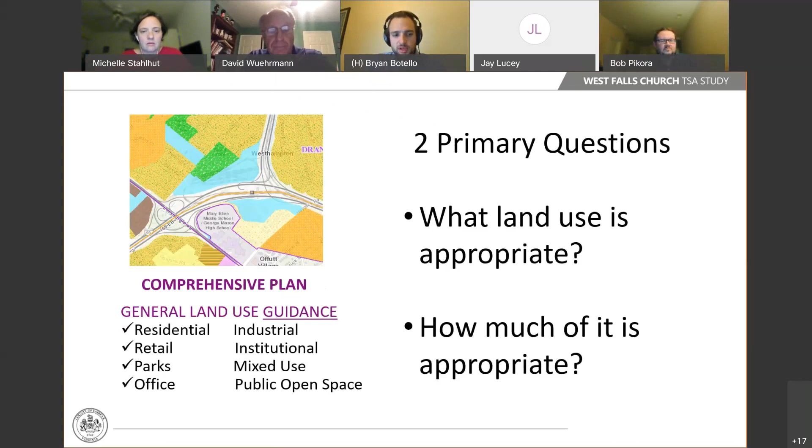In addition, there are some other questions we seek to answer in the comprehensive planning process, but they're by no means the only ones. Especially in transit station areas like West Falls Church, our community business centers, and our urban centers, you can find additional types of guidance in the comprehensive plan. This is by no means an exhaustive list, but you can find design guidelines or recommendations on establishing connections or smooth transitions between developments and neighborhoods, and guidance on the location of public facilities and amenities.

As I said, these are general guidelines. While many people are interested in details like what retailers may be there or what styles of architecture, we don't go into that kind of depth in the comprehensive plan. It's more about bigger picture issues, like does residential go here, does office or retail go here, is it mixed use, and how many square feet or dwelling units are appropriate.

So with that being said, what's our process here with the task force and the West Falls Church Comprehensive Plan Amendment? I'll finish covering these four items quickly, and then it may be worthwhile to pause for a couple minutes to make sure these are clear to everybody, so we can open it up for a couple questions from the task force.

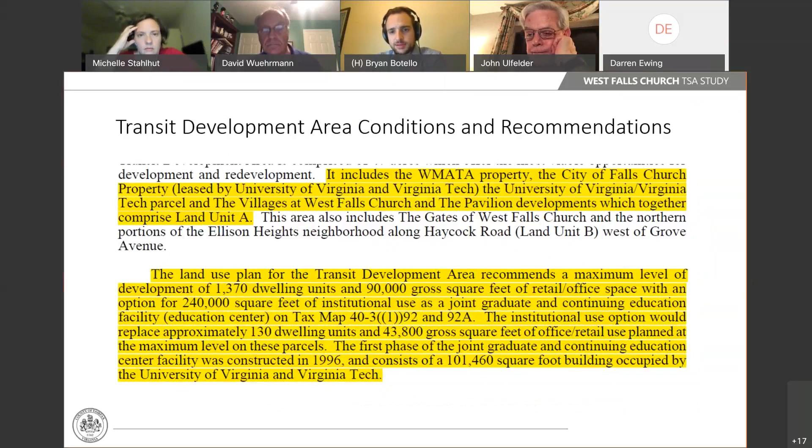Right now we're not looking at any draft text, it's all currently adopted plan text. The same with these figures. For example, this is figure 13, which is in the current plan for the West Falls Church transit station area. We would imagine that the City of Falls Church and the University of Virginia-Virginia Tech tract would probably be combined into a single tract and renamed the Virginia Tech tract.

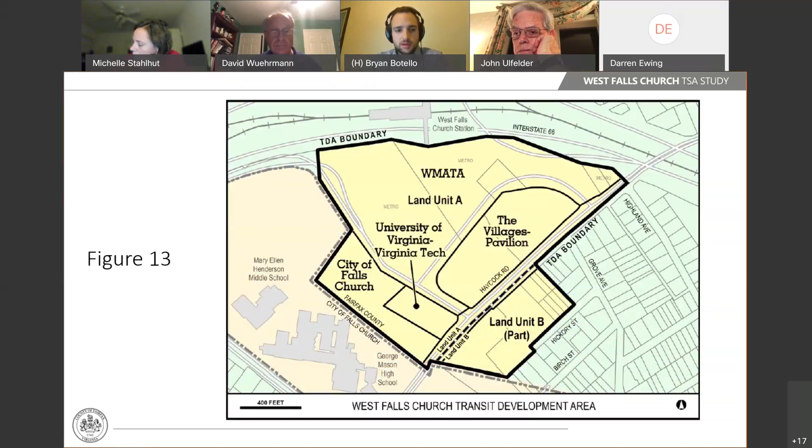And then the bulk of the updates we're expecting would be under the site-specific recommendations in the Land Unit A section. So pictured here is part of the recommendation on the WMATA tract. As I mentioned earlier, we're looking at land use and intensity, so it has the location of where we're talking about, and land use appropriate for residential development, and the intensity, 30 dwelling units per acre. And then it has other guidelines, as I mentioned, to the extent that such development complements rather than competes with the use of the transit hub, and it recognizes some of the surrounding uses and how this fits in.

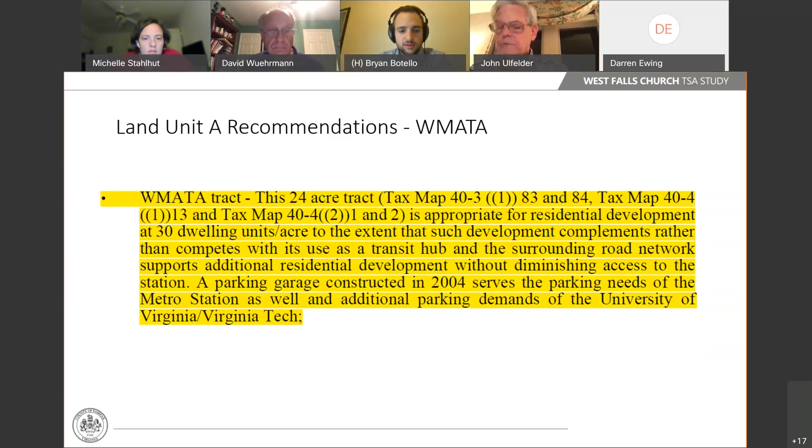Similarly here, the part of the Virginia Tech recommendations. This is kind of the meat of what that task force will be looking at in terms of a plan amendment. So this is the guidance found here specific only to the Virginia Tech parcel and doesn't relate to any of the other portions of the transit station area. Again, you can see recommendations on land use, institutional use, or residential or office retail, and the intensity: 240,000 square feet of institutional, 130 dwelling units, nearly 44,000 of office retail. What's not pictured here are the site-specific conditions for Virginia Tech, which encompass some more of those other guidelines that I mentioned earlier. You can find those in that highlighted document that I sent around to the task force.

So now that we've briefly covered what's up for amendment in the current plan, let me go over the types of edits you can expect to see. There are 3 different types of changes: editorial changes, which aren't substantive; formatting changes, moving things around for clarity; and then what this task force will focus on, the substantive changes that affect the land use recommendations in the West Falls Church area.

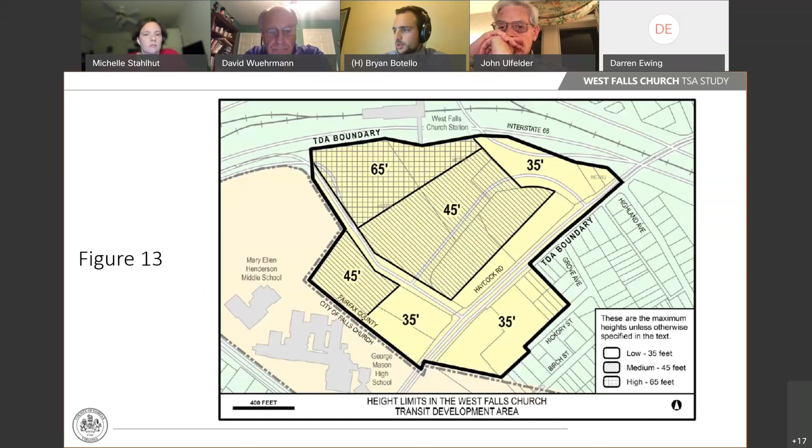And as I mentioned, the figures in the plan will have to be considered for updates as well. I hope that provides some clarity to the task force on how we'll be looking at the plan amendment. So at the next meeting, we can start to review some draft text. Are there any questions regarding that?

Let me see if I can open up my participants tab. Any hands raised from the task force members? Was that clear? I don't see any, Brian. I don't see any hands raised except previous ones from attendees that I'm sure they haven't taken down. Oh wait, I'm sorry, there is one. Are we taking questions from attendees as well as task force members at this point or not? Right now we were just going to do task force members, especially because we're under a bit of a time crunch.

I would say to anybody who's got their hand up who's just an attendee now, if you still have a question at the end and we have time, maybe they can ask then. Brian, if we have the time. Yeah, that works. All right, I'm not seeing any task force hands up. In that case, I think that was helpful. Thank you. Yeah, of course.

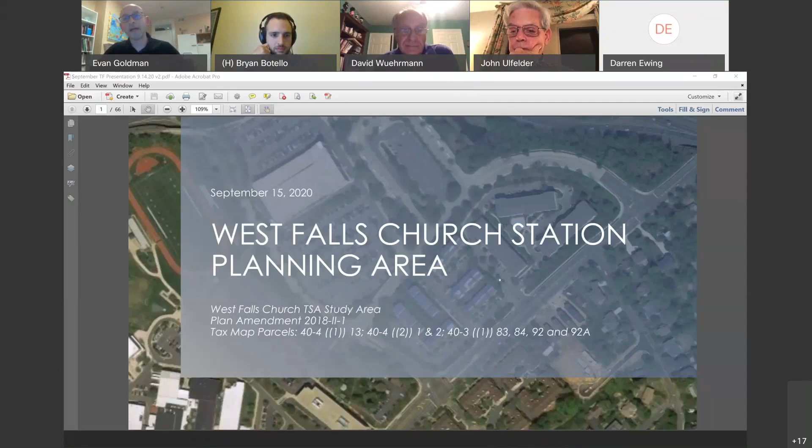Great. I'm going to actually, so for some reason, weird. Okay, you can see it now. You can see it says West Falls Church Station Planning Area presentation. Yes, excellent, it's the cover sheet. Great. Okay, so as I present, I will just confirm that we're on the same page, because sometimes it's a little bit slow. So with that, I'm gonna move forward.

Okay, there we go. So first of all, for those who didn't hear at the beginning, I'm Evan Goldman, Executive Vice President of Development and Acquisitions at EYA, a local development company. There's a number of us on the call today: from Rushmark, Neil Kumar; Brant Snyder from Hoffman Associates; Pam Lee from my office at EYA. You already heard from Kevin Sitzman, our traffic engineer. I believe we have our land use attorneys on the phone as well, Andrew and Bernie from Walsh Colucci. And I think that's it, but I may have missed someone, I apologize if I did.

So with that, today we're going to talk about progress and process update, concept plans for West Falls Church Station area, which for some of you will be the first time you've seen this. We have been doing some community meetings, so some of you have already seen some of the slides. We'll talk about circulation and mobility, and then traffic analysis as well.

So just to give everyone a progress update of where we are and where we're going: a year ago, at the September 2019 task force meeting, we presented some development proposals. Throughout the winter, we did traffic studies and continued to modify our plan. As you know, we took a little bit of a break for a period of time while we tried to solve the intersection issue at Route 7. Then COVID hit in March, and that slowed us down for a few months. So spring of 2020, we didn't really have any meetings until the summer.

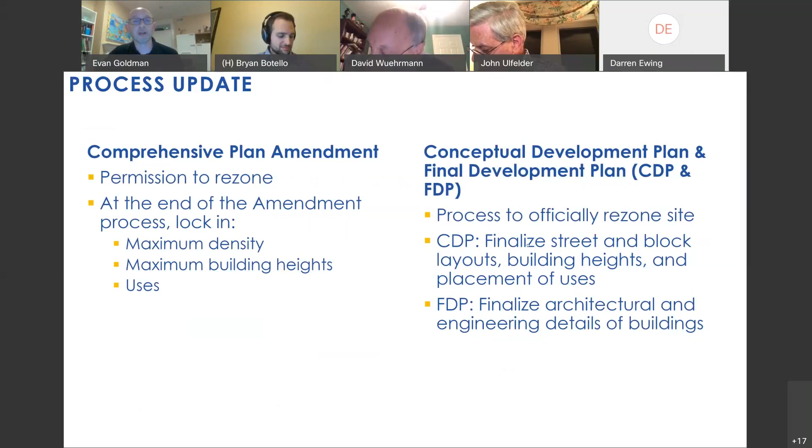So this process, while it has taken a while because of COVID and the traffic studies and the unique attributes of this area, the request is not particularly large. It's really about how do we do it right? How do we get the right grid of streets? How do we come up with the right plan? How do we provide better access to transit and design a project that's mixed use and really amazing? That's what this process really has been about and really should be focused on.

So this is our new concept plan that we've been working on and we've shared with some of you in your community meetings. The main goal really stays the same: creating a safe pedestrian and bike oriented way to get through and to the metro from Route 7 all the way to the metro, and then continuing those bike lanes all the way out to Haycock so that those coming from the community on the other side of Haycock will be able to get to the metro more safely, as well as the new people moving into the apartments, condos, or townhomes, as well as those working in the office buildings within the actual parcel—this ability to get around without having to rely on the car.

So this central spine open space is really critical. And then secondly, getting the existing bus infrastructure a little bit more out of the way. Today, that bus infrastructure really sits right in the heart of the WMATA site, so to walk to the metro, you're walking through essentially a parking lot. The concept here is to make that a great urban street and put the bus infrastructure on the outside up against Route 66 so that it doesn't impede the pedestrian bike flow to the metro entrance.

The Commons Drive, just to give you also a sense of scale, the City of Falls Church has rezoned that property for about a 3.5 FAR. Obviously, we're not the developer of that site, whereas the WMATA site is a 0.96 and the Virginia Tech site is a 2.5. So a little bit different than what you would typically see.

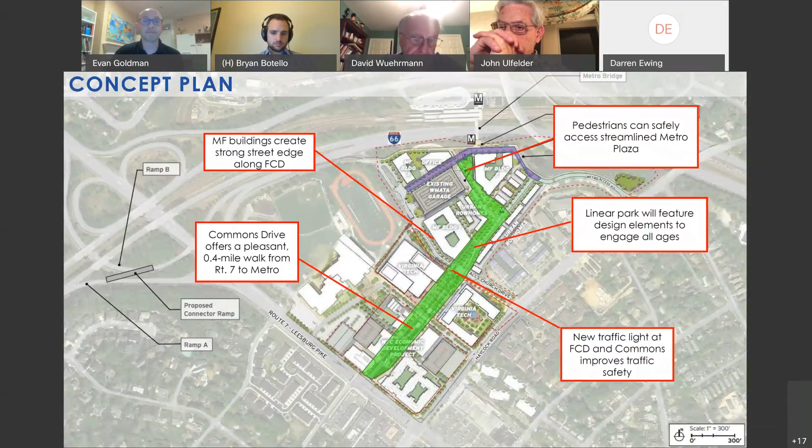This is just to give you a sense of part of the reason there's so many different types of uses within this plan—from residential apartments to condos to senior housing to hotel to office to academic to townhomes—so that it can be absorbed relatively quickly, meaning we can build this without it all competing with each other. For example, if this was what's already proposed, 700 apartments, that's going to take years to absorb, which means you have to build it out over a longer period of time. That means the community is getting it piecemeal.

Whereas what we've come up with here is a design for the whole neighborhood that, because it's all different uses that work well together, we can deliver it all within a 3 to 4 year period of time. So everything you're seeing on this page would be built before about 2024, 25, with the city parcel going first, followed by Virginia Tech, some more apartments, and the townhomes. That's great from an absorption perspective—it means we're not flooding the market with one product type and potentially tanking the market, whether that's townhomes or rental apartments.

And what it means is you get all that infrastructure, all the open space, all the walkability up front with this first phase of development. It all comes online together, which is really great. And that's actually pretty rare. Most projects of this scale get built a little block at a time, and you get the infrastructure along the way, sometimes behind and sometimes ahead.

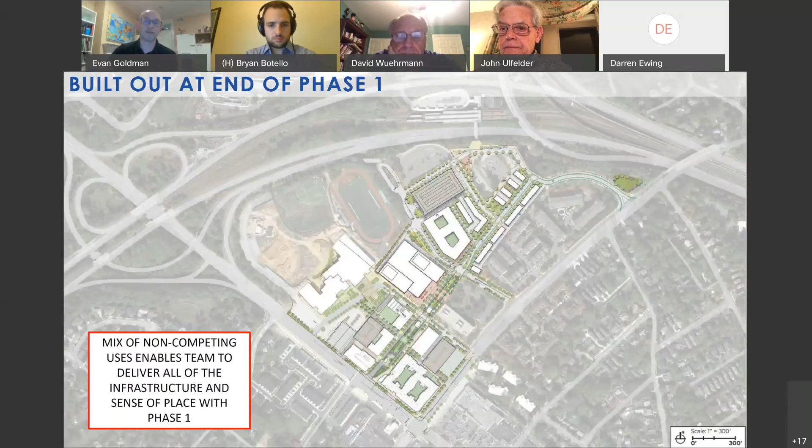And then this is what it looks like when it's fully built out and complete. You can see these dark green lines are the bike lanes going all the way up and connecting to Haycock, as well as pedestrian spaces. Those are all really nice broad sidewalks. There's a shared use path that connects directly to the Metro from the bike lanes, and sidewalks everywhere, which I'll walk through as part of our circulation plan in a few slides.

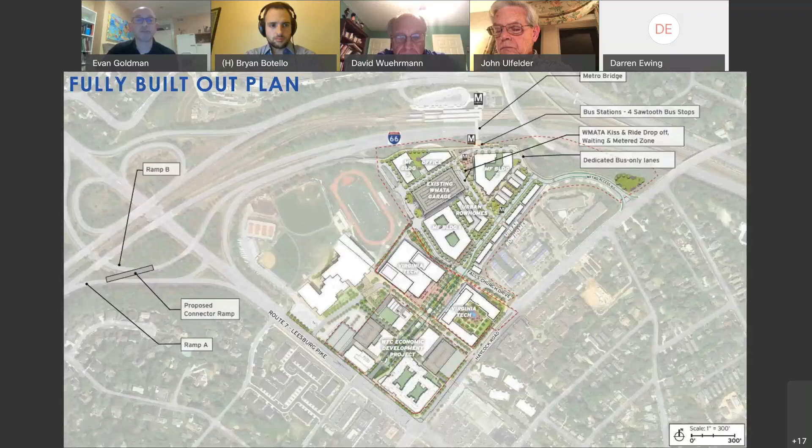We've spent a lot of time thinking about and talking about open space. I think we shared with this committee back in February some pretty images of what we thought those open spaces might look like, and we've been sharing that in our community meetings with folks.

But this just gives you a sense of scale of how it breaks down and what the percentages are. Overall, each of these numbers are highlighting different spaces within the plan that are open spaces to be used, some of which are within the city, some of which are in the county.

As you can see, we've included the fields within George Mason High School, and that was purposeful. About 50% of their rec league users are county residents, not city. So it really is an asset, whether you're walking over there to use tennis courts or run on the track. It's kind of a shadow anchor outside of the county, but that's always worth being aware of.

So what this plan ends up with is about 24 acres of open space. It's 37% open space on the WMATA site, which is almost double the requirement. On the Virginia Tech site, it's 50% more than the requirement at 30%. So there really has been a lot of thought put into making this an open and green space, preserving tree preserves, creating tree preserves, and working with county staff and the task force to make sure this feels like a livable place long-term.

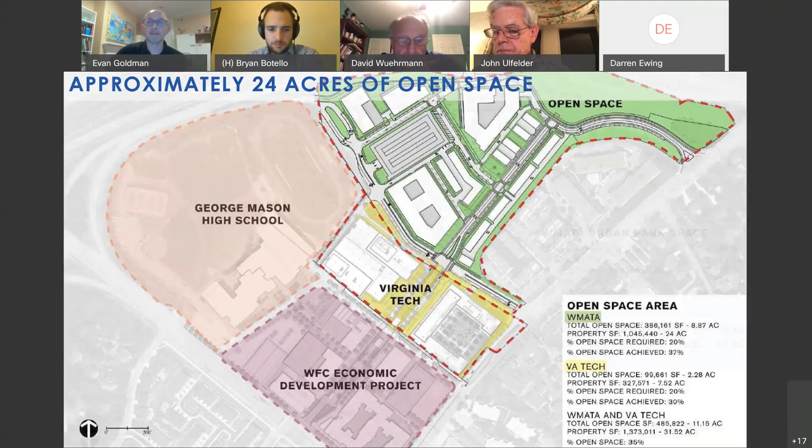So on the next slide, we'll get into each individual project. On the WMATA site alone, in addition to the open space, which is double the requirement, the urban park space requirement would typically be 2.1 acres on this project. We're at 2.56 acres, so once again above where the urban space requirement would be.

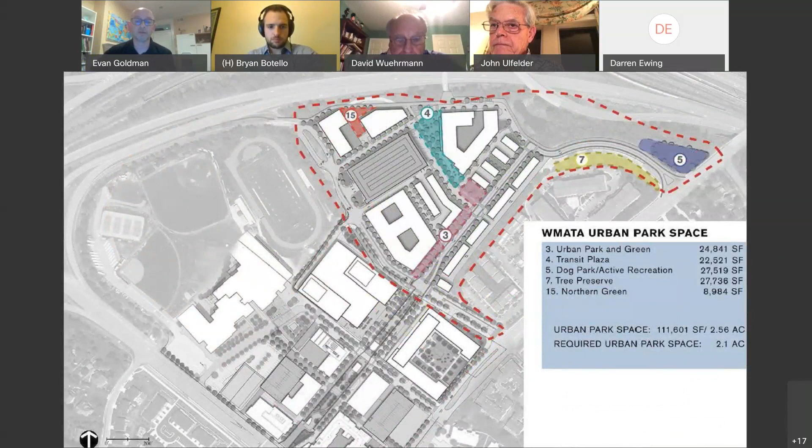And then the key would be at CDP, really working with staff and the community to design each of these spaces thoughtfully. We have some ideas already, of course, but that will get better with time. Virginia Tech similarly has a requirement of 1.3 acres, and they've got 1.58 acres of active rec space, so also above the requirement.

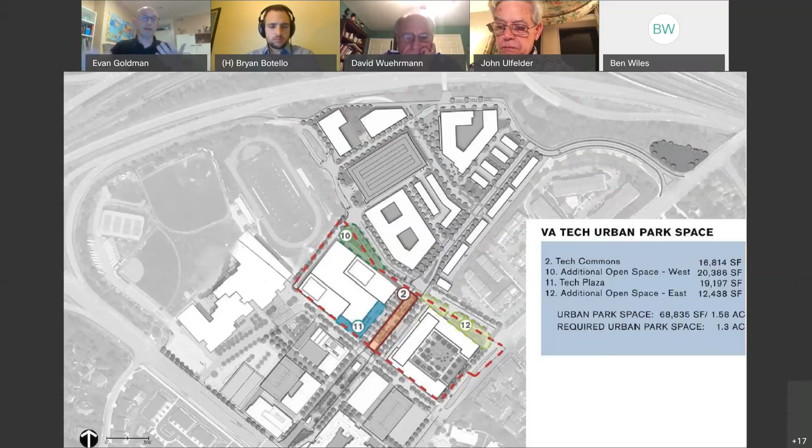So combined, as I said before, one of the really big impetuses of this plan is that the zoning recommended in the comp plan was especially suburban in nature - kind of low level, 700 apartment units spread throughout the site. What we think is more appropriate is, where it's appropriate, let's have some taller buildings and create as much open space as possible. And that's what we've really done.

Before, we always struggled with where this street was supposed to go, and we finally just made it straight, which seems to be the most logical thing to do. It'll be the best for traffic flow, for bike flow, and for pedestrian flow.

The space behind the townhomes here is actually the roadway today. So you can get a sense of how far those homes are from you, and you'll have that tree screen blocking your residences from the new development.

We've kept the heights low and the development low intensity along the existing residential, and then stepped up towards higher heights and density as you get to the metro itself.

As you know, on the high school site and on the Virginia Tech site, the park space is in the center median. When you get to the WMATA site, because of the geometry of the site, we've pushed the open space to the western or northwestern side of the road instead of in the median, but it continues as an urban linear plaza and then ends in a park and wraps all the way around to the metro.

So the concept is once you get here, you can see that metro, and this whole space will be designed cohesively so it feels like a space that was designed appropriately.

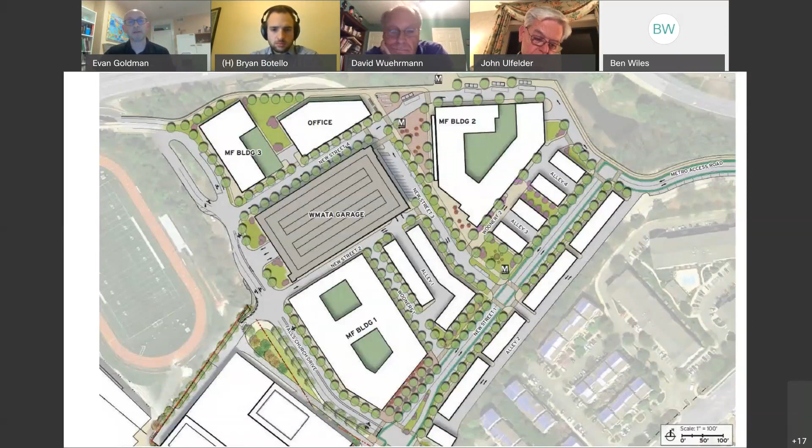That concept along there would be, and we've actually been working with staff on some new ideas related to this, so this will change a little bit.

But the idea is alleys of trees that really make it safe and comfortable to walk there. Obviously stormwater management, elements of play along that pedestrian experience as you go through the WMATA site to the metro, that in and of themselves can be draws.

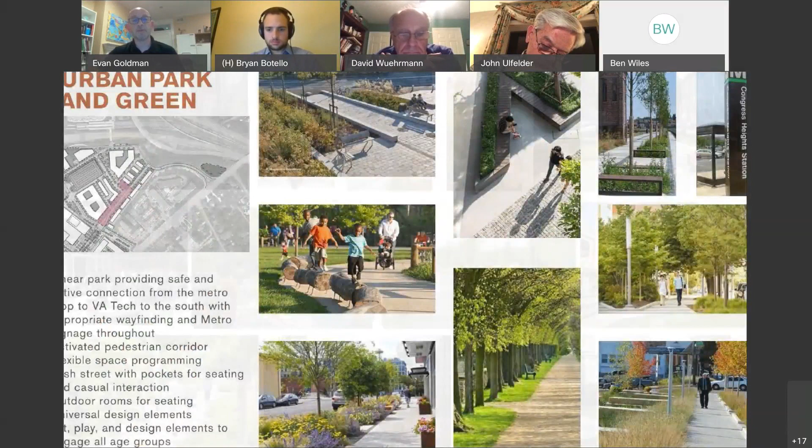On this next slide, there were two images we really loved, or three, I'd say. One is this kind of kids play structure in Noma in DC, which is a multi-level play structure that's linear in fashion, where you can imagine people walking their kids or grandkids into this urban plaza and playing, and also creating activity on the street.

The idea of a garden or something that in and of itself becomes a draw, so that if retail is not active and retail is still struggling, there's some other reason to come to this place, whether it's to see the beautiful roses blooming, walk in a botanical garden, or sit and enjoy outdoor seating areas protected from vehicular traffic with movable furniture. And of course, open spaces where people can throw a Frisbee or just enjoy. That whole concept stretches from the high school site all the way to the metro.

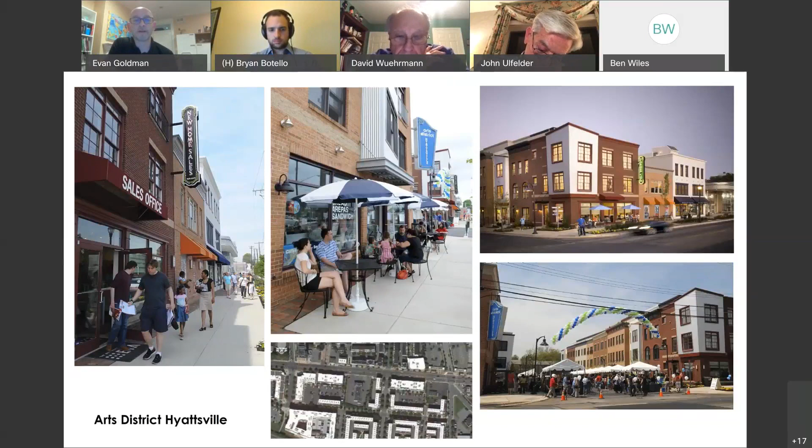I've been talking to a particular staff member about how you could do that within the Fairfax County zoning ordinance. These are additional images of what that project looks like today. Even though those are townhomes, they have a much more multifamily oriented feel. As I said, this won't be the architecture, but it gives you a sense of scale and concept. This is another image from that project.

I will say this project was cutting edge in its day. This was in Prince George's County, and these houses sold for $300,000 to $400,000 each. So very different architectural style and level of detail than you'd find in Falls Church, but it was successful in its own right.

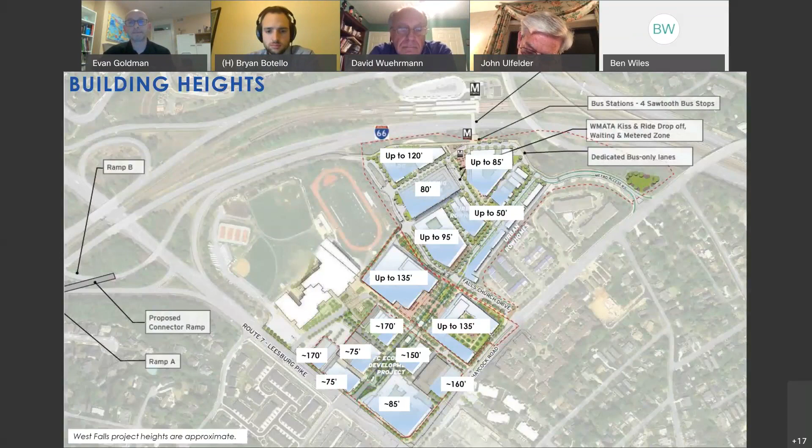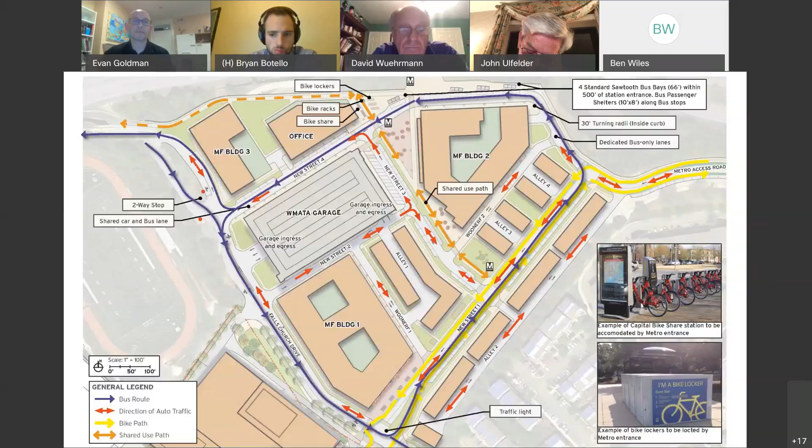The bike circulation in the larger area, there's a shared use path on Route 7. We'll be building bike lanes all the way from Route 7 over to Haycock.

One thing that came up tonight that is worth working with the county on, and I think it's been expressed eloquently, the streets within the Mount Daniel neighborhood on Grove and Highland do not have sidewalks. You're 100% correct that they're not safe. And similarly going over the tracks to the neighborhoods to the east of Route 66.

And so I know that the city and the county have worked effectively to get some NVTA grant money to build sidewalks on Shreve, just to the other side of Route 7. And I think really, if the community really wants to see something like that, that's really something to focus on, because I agree you want to have those safe pedestrian areas throughout these neighborhoods. And it's a shame they weren't built with sidewalks to begin with.

But you can see the bike lanes here, as well as the shared use paths, and then the vehicular flow for the whole larger area.

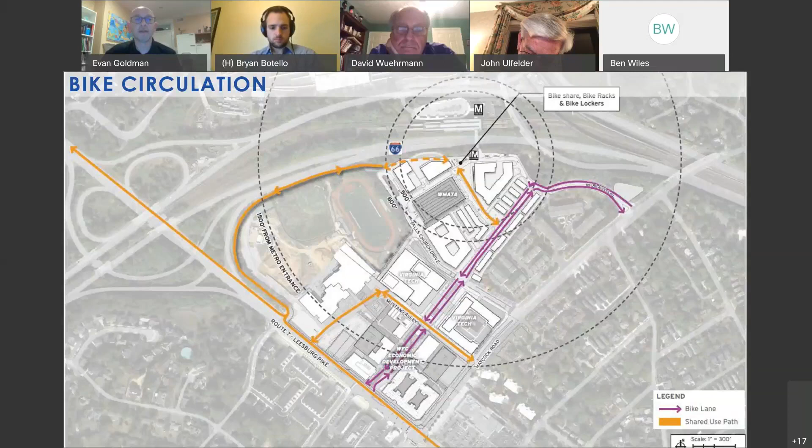I'll highlight one thing here that we'll come back to when we get into the traffic study. This ramp is really critical. It's under construction now, and it connects the 66 off ramp, where all those cars today come to Haycock, make a left turn to go to the metro, and clog up this intersection. With this addition, people who want to go to metro from the west will be able to get from 66 all the way to the metro itself more quickly and directly, without going through your streets or your intersection. That takes roughly 300 to 400 cars out of this intersection and helps make this function much better. We'll talk about that shortly.

Obviously, primary access and flow is still on Leesburg Pike and Haycock. Secondary is this grid of streets we're creating, which is really critical as well. Somebody on the call earlier mentioned Waze and Google Maps, which is really often how people get around neighborhoods today. More than likely in the future, as local folks, if you need to go to Haycock and make a left, and you live in the pavilions or the villages, for example, or to the east of Route 66, you would likely shoot off onto the new Main Street and make your left turn here because it's going to be a faster route than sitting at Haycock. What it does is it allows for distribution of traffic.

And what's great about the apps is, normally in the old days, if you just looked at a map, you would never think to do that, because your assumption would be the fastest way would be to just go straight and make a left turn. Those apps, because of their algorithms, can help point you in the right direction where there's less traffic flow.

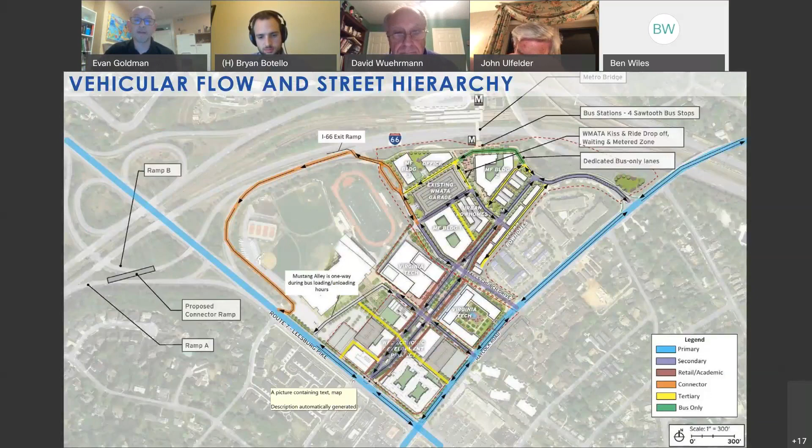That has been, I'd say, about 8 months of really, really hard design work to come up with something that seems to meet everybody's needs, that allows the commercial property owners to have access, protects the neighborhoods on the other side of Route 7 from cut-through traffic, allows the left in and left out, and allows people to have access to the metro and all the new development here. This is the solution that has been arrived at, presented to VDOT, FCDOT, the property owners, and the supervisors. The concept is that at the end of Chestnut Street, Chestnut will now close.

It will end in an open space, and then there will be an opening into the current shopping center next door. Essentially, we'll have a new opening that will be at a traffic light. So for people who live in the neighborhood who want to make a left turn out on Route 7, they will have the ability to go through that shopping center to make a left out. Waze and other apps won't take people there because it'll show this as a dead end, but local folks will be able to know how to do that.

For you as well, since you guys live in the neighborhood, that's something that you might end up using to cut, to go straight or to make a left turn onto Route 7 from there. And what it really does is it allows the commercial property to maintain their access as well. They were under threat of potentially being closed off with a right in, right out along this entire edge.

And that is how we were able to solve this issue and create a traffic light, which then creates safe pedestrian crossing and gets a lot of these folks the ability to walk or bike or get to metro more easily. And I was listening to a lot of the questions tonight, and traffic is clearly one of the biggest issues in this area. But traffic solutions are things that build on each other.

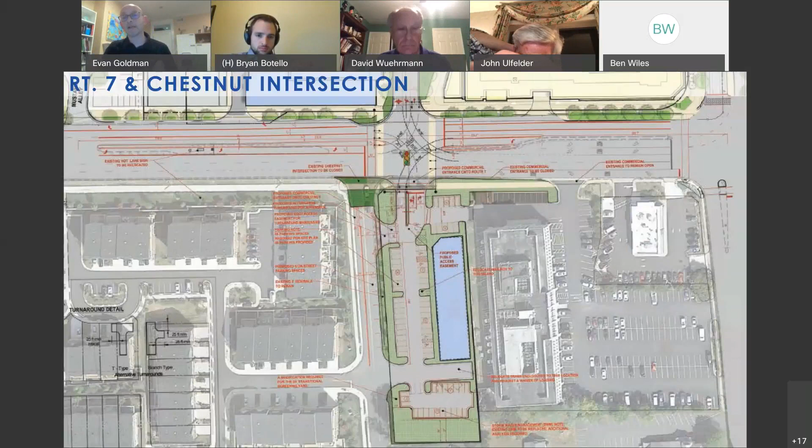And so that's what really needs to happen here. And I love the comments we were hearing from people in Mount Daniel - you're right, like if you had sidewalks, X percent more people in your neighborhood would walk to metro safely and more comfortably, and that would take X number of cars off the road. So it all builds on each other.

There's a new traffic light proposed at what is today the high school entrance, but it's going to be the entrance to the main street. And then there's a new traffic light at Falls Church Drive and the main street. That's largely because of the number of cars coming off Route 66 - that just needs to, that would be difficult to function as just a stop sign intersection.

So by creating this great pedestrian and park connection all the way to the metro, it allows people to get off the BRT stop and then hop on the metro or vice versa. Or from the development, or for you walking down a really beautiful street, get to BRT and head over to Tyson's or Alexandria. So that's also a part of the future planning.

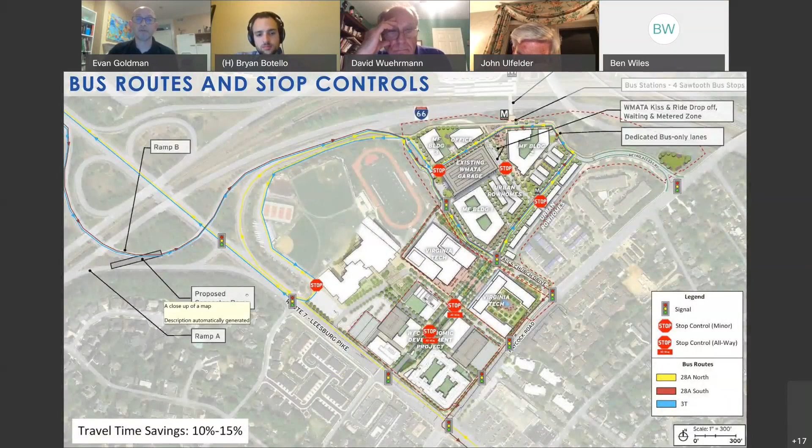Parking real quickly - another benefit of this design. The current WMATA parking lot has about 2,000 spaces, fairly underutilized as many of you probably know. When the Silver Line opened, a lot of people just stopped driving in and parking here, and they dropped to about, at the low point, 700 to 900 cars per day instead of the 2,000 that used to be here.

WMATA then reduced pricing at this station dramatically in order to induce more parkers, and so you now have about 1,100 to 1,200 parkers, but still well below the 2,000 spaces that are there today.

The thought is, over time, WMATA can use parking management strategy - essentially this station should really go back to the same pricing it was before. That will push more of those cars out towards Vienna, towards Dunn Loring, towards Reston, so that those cars are parking sooner and not coming into the core and clogging up the streets and highways as they get closer.

That would bring the station back in line with where it probably is from a demand perspective, which is about 1,000 spaces. So we are leaving 1,200 spaces in the central garage that would stay as is. We're also leaving the phase 3 land, about 190 spaces, on an interim basis until that project gets built, so there will be roughly 1,400 spaces here today, more than enough for current demand as well as some growth. That gives flexibility long term. So just to give you a sense, the remainder of the spaces would get filled up with development.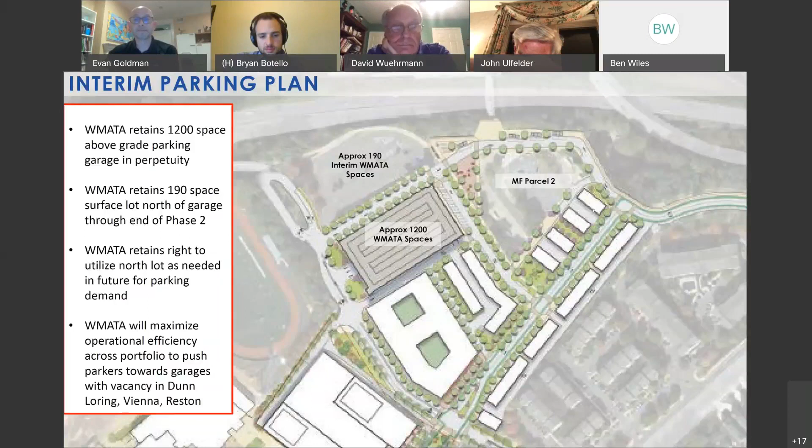Okay, so traffic impact analysis. Kevin, we hadn't talked about this in advance - why don't you do it in the interest of time, since the hour's getting pretty late. As was mentioned before, we'll go through in a lot more detail next time, and some of this is a little bit of review we did back in December, so I'll try and move through the first part fairly quickly.

The way we do the traffic impact studies is in a layering process. The first thing we do is take existing traffic counts - those counts were taken in 2019. Those counts are fed into a series of equations to identify the delay for each individual movement. So if you're headed eastbound on Route 7 or southbound on Haycock to turn left on the 7 and head into Falls Church, those sorts of movements conflict with one another, and the computer models spit out delays in seconds and tenths of a second that tell us what the wait times are for those various movements.

To make it easier to discuss, we assign what's called a level of service. Level of service A has the least amount of delay, level of service F has the most amount of delay. Typically, and in this case, level of service D or better is considered acceptable, while level of service E or F is unacceptable.

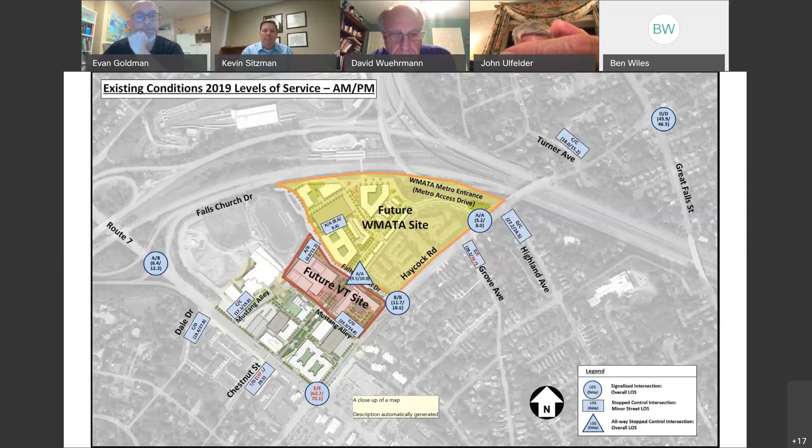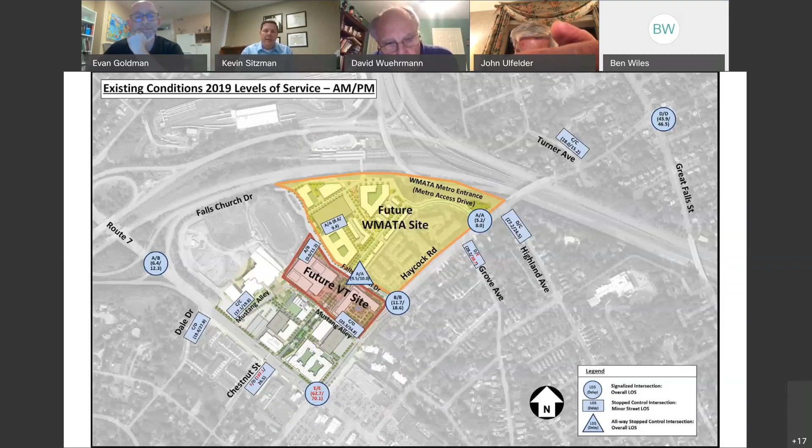So what you notice is most of the letters and numbers in these boxes are in black, meaning they're acceptable. You can point to the big signal at 7 and Haycock - that is overall level of service E. Then there's a couple of side streets, Chestnut and Grove, that have one peak hour that does not operate acceptably, but for the most part the rest does, although some of those delays are pretty close to the border of level of service E. That's existing conditions from 2019.

Evan, if you go to the next slide - the next thing we do is add some regional traffic growth and other already-approved development projects. In this case, the high school site is included in the background, so that's future without development. We grew the existing traffic volumes by 11.56%, which is how the math works out compounding the growth over the years from 2019 to 2030. And so naturally traffic increases, so delays increase.

And what Kevin just said is really critical for everyone to understand. That's just kind of an underlying assumption used in all these traffic models, that traffic's just going to continue to get worse forever. And it's not necessarily proven out in many locations, whether it's in Bethesda or Arlington or other places.

If you build good TOD, you can actually affect people's behavior and change that. But it's unfortunate, that is how traffic studies are typically looked at. As Evan said, the requirements, particularly VDOT's requirements, are that we include positive traffic growth, an increase in traffic volume over that period of time. We did not take any change in the larger area.

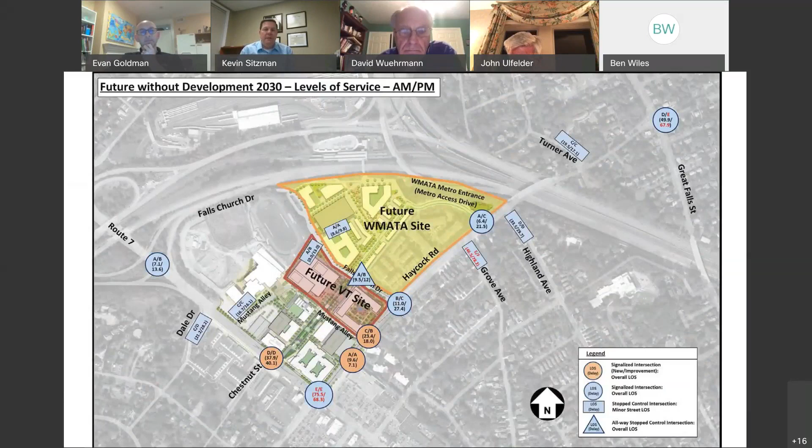And so roads like Route 7 time with most of the green time given to the main line and with very long cycle length. It takes a while to get out onto the main line. Once you're on it, you should be able to move more, depending on how well things are timed and what kind of cross traffic there is on the other streets. Sometimes that's true, sometimes that's not.

Is that correct? No, so we haven't gotten to that yet, David. So all right, so the second one is just if the city builds, but WMATA does nothing. Is that right? No, Kevin, sorry, I'll go back and walk people through them again because there's 6 or 7 slides we're going to look at.

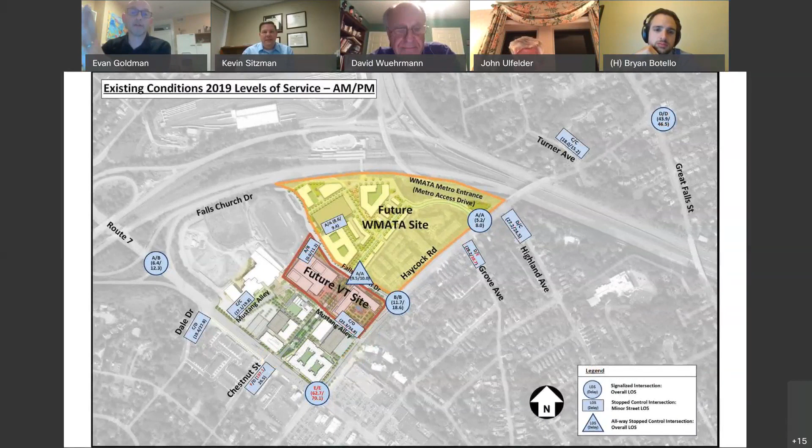So first is existing conditions. So today, that's where you're at. You're at a D and an E on Grove, and a D and C on Highland. That's existing conditions.

Future without any development on WMATA, Virginia Tech. This includes the high school site and includes a 1% growth factor per year for background traffic. Your intersections start failing just based on that, even if nothing happens at WMATA and Virginia Tech. This is like a no-build scenario for... This is a no-build scenario, exactly.

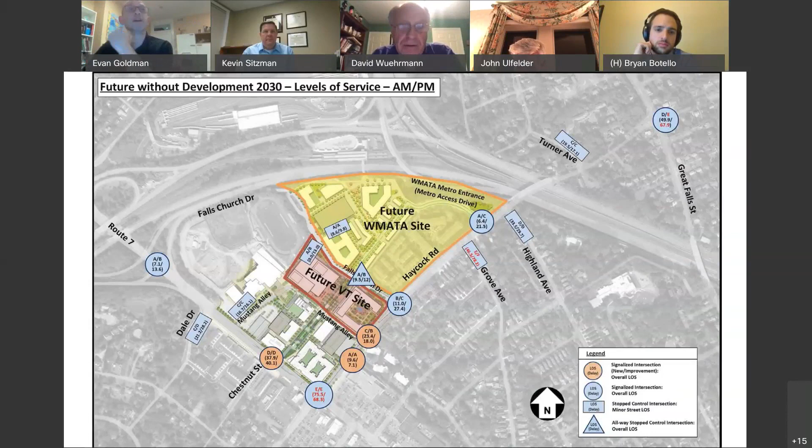Okay, and the next one is adding the by-right development, right? If there were no comp plan change, but somebody built 700 apartments, 50,000 feet of retail, and a few hundred thousand feet of commercial on the Virginia Tech site, it essentially gets worse because nothing's been mitigated yet.

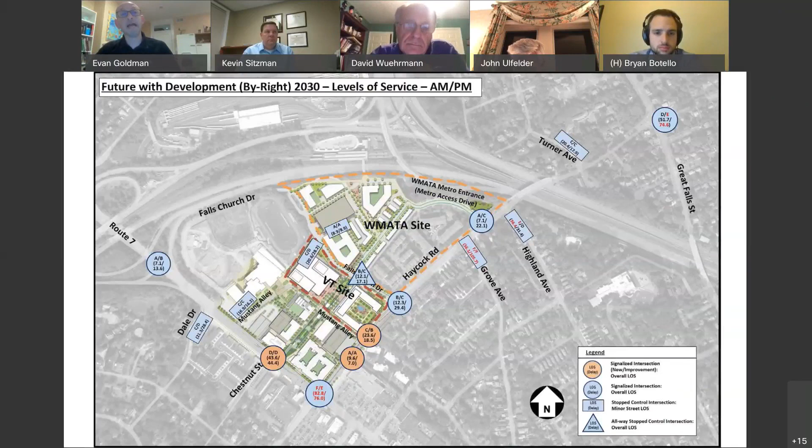And then now we'll get into future with WMATA and Virginia Tech. All right, thank you, but with no mitigations. And so you'll see this is, of course, the worst that you're going to see on all the slides, where a lot of things fail. The Route 7 and Haycock intersection fails. The Great Falls intersection starts failing. Your intersections start failing, even some intersections within the development go to E, which is typically acceptable for urban areas. But the point is, without any mitigations, things get worse.

So sorry, I interrupted you, Kevin. That's actually the whole purpose of this slide. One of the things we certainly look at is, if we have the traffic and we don't make any changes to the road network, what happens? What needs to be fixed? What improvements could we make?

And certainly all of this would look much worse if it wasn't for the new ability to turn left into Chestnut. So from eastbound Route 7, turn left into Chestnut. Evan, if you want to trace these things as I talk about them, turn left out from the Commons to Route 7 to continue eastbound. And then, as you pointed out earlier Evan, the ramp connection between ramps A and B at the Route 7 I-66 interchange takes like 300 cars out of the Route 7 Haycock intersection on some of the highest conflicting movements that there are. So without those, these would look worse, but we went through and tried to fix that.

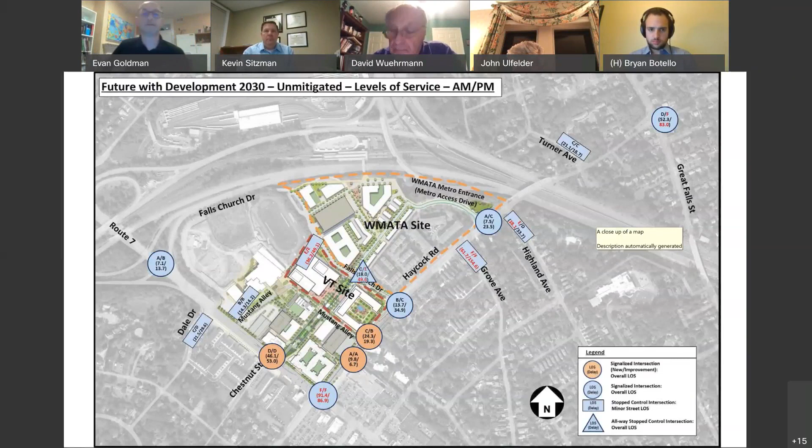Okay, so then let's go towards mitigation. So Kevin talked about this, we've recommended some mitigations to FCDOT, which we just submitted and it's under review. Right, and Evan, remind me, do we have a slide showing the mitigation measures? I don't want to go to it yet, let's talk about this, but if yes, we do. Yeah, okay, I couldn't remember, but yes we do. So that'll be easier to talk about.

We'll go through the specific mitigation here in a minute, but it involves changes to the Route 7 Haycock intersection, changes to the Great Falls and Haycock intersection, and some changes within the site to the traffic controls. Because of that, we're able to balance out the traffic, for instance, between the Commons and Haycock exits to get back onto Route 7, and really just balance everything out.

You'll actually notice that Commons/Chestnut, the orange circle on the left side, actually works better than it does under the no development scenario. It's level of service C, because again, we've been able to take more traffic out of that intersection and balance it better with Haycock. So we'll go over those improvements in a minute.

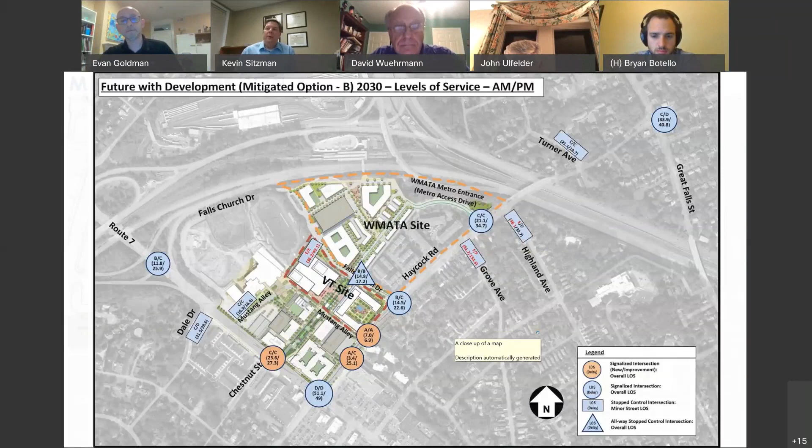Right, so you want to look at how we make that happen? There you go. Okay, so we've turned the north arrow a little bit. This is Route 7 across left to right on the screen, Shreve at the bottom of the screen, and Haycock going off the north side.

In order to improve things, we've built on what's happening at the Chestnut Commons intersection, certainly utilized that as an improvement, and then continued on. So what we've done is reclaim a little bit of the middle of the road space on the left side, or west side, of Haycock and Shreve, and put a median in there that's a little bit wider than it is today.

The reason we can do that is because of the ramp improvement and the additional left turn at Commons, across from Chestnut. The volume that the ramp carries is equivalent to VDOT's guidance on having two left turn lanes, so really we should be able to take both left turn lanes away. Don't know how you quite do that, but the amount of traffic we're removing from the Haycock intersection is worth two-plus lanes in terms of ability to carry it through there. So we only really need a single left.

If I could just real quick partially answer Bob's question, there is actually another option in the traffic study that maintains the second left turn lane, because we heard VDOT loud and clear on that. So those two things can be compared side by side by staff, because we do understand that direction. Our assumption is once they see both and see the numbers, they'll agree this is a more logical approach.

I'll skip this in the interest of time, but this was our last slide. We were just going to talk about some of the benefits of the plan, including affordable housing at 15%, which is huge, open space, bike lanes, reduced congestion, and the buffer. So there are really some great benefits with almost no additional density at these metro stations, and clearly some mitigations on noise, light, and traffic.

Thank you both. This is David. I know we don't want to take a lot more time. Is there anybody else on the task force who wishes to add anything or ask any questions on this? I'm not seeing any hands.

Bryan, do we have an opportunity, Darren's hand is raised from outside. I'm sorry, who's? Darren's. Oh yes, Darren, go ahead.

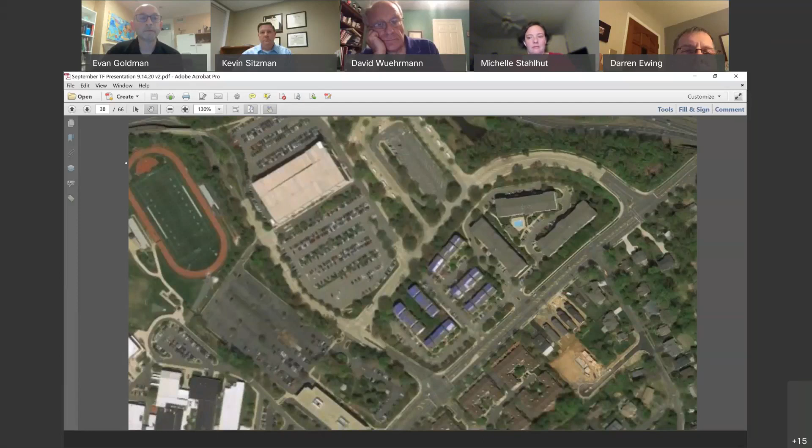So just one question for Evan. You had a circulator slide that had the buses, but it also had pedestrians and cars. I think it's going back now about 6 or 7 slides. Yep, and my question was about that one, if we can find it here real quick. And that's predominantly on the WMATA site. I believe my question revolves around that.

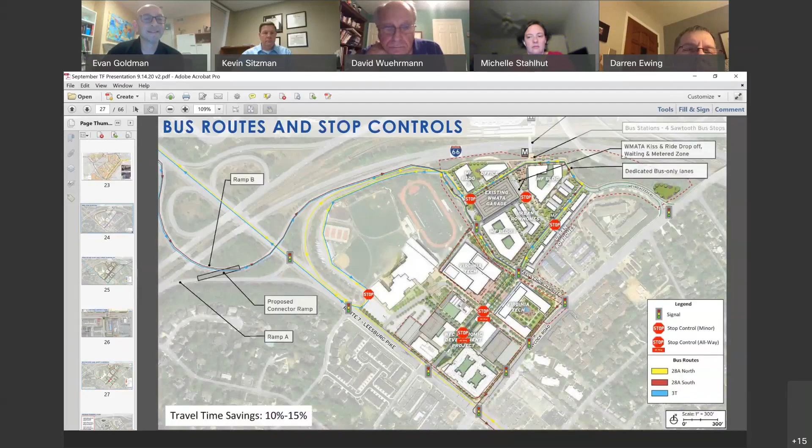Not that one, hold on. I know which one, I know the one you're talking about. Yeah, it's fine, take your time. It's right here, there we go. Next one, sorry. There, is that the one? There it is, right there.

Okay, so the bus is in the dark, I can't tell if it's blue or purple, whatever. Yep. And the point in question is on the southern portion here, where it's straight. That actually has interparcel connection. Along that is—just give me a quick second—that's 2 lanes each way, so a 4 lane kind of boulevard there. And it's got retail on the ground level. What's going on in that activated part of this?

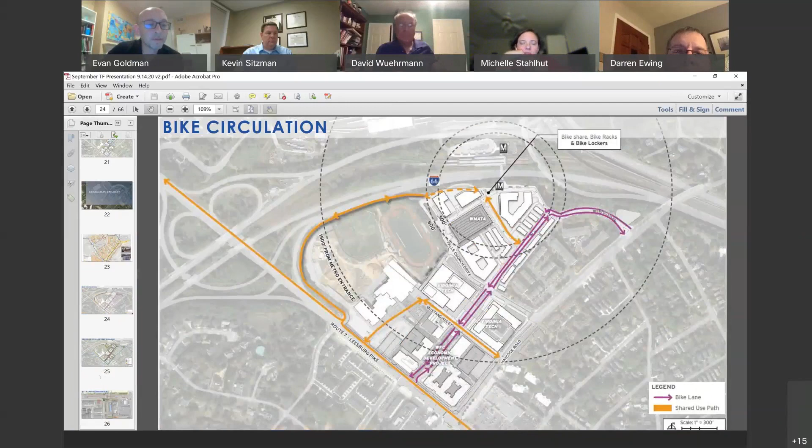My question revolves around the interaction with the buses looping through that site. If I've got pedestrians and bicyclists, and folks trying to dine in cafes, with these big buses and all kinds of other multimodal traffic going through there. Yeah, it's a great question, Darren.

So Darren, I'm going to try to describe this the best way I can. There are the 3 parcels, right: the high school site, Virginia Tech, and then Lamada. The high school site and Virginia Tech are really the heart of the double-sided retail main street with the big park in the middle, where there'll be outdoor dining and all the stuff you're talking about. When you transition to Lamada, there will still be some retail, but it'll be more service-oriented, more residential in character. And that's where the buses would be on the main street. So the buses don't go on the portion of the main street with the hustle and bustle crazy activity—they're on the quieter part that goes off towards the metro.

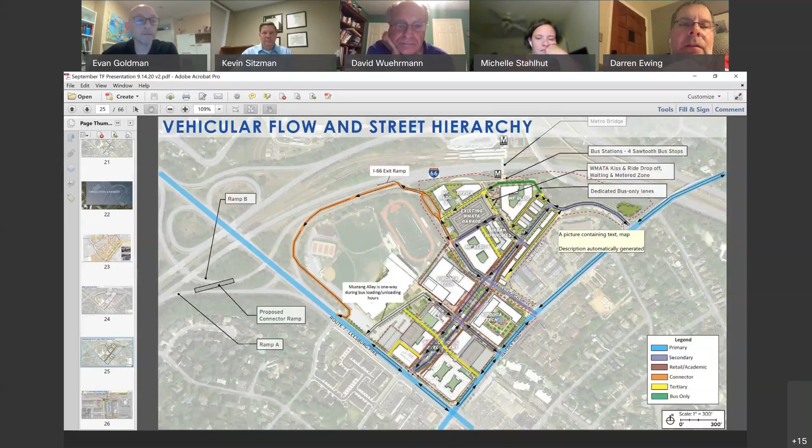So but you're still going to have bicyclists and people walking, so there's going to be a conflict with the buses there. If you just jump back to that slide, because I'm most concerned with the buses—is this the only circulation available for these buses, to go along that route? It's just that we're trying to encourage folks, and I know there's a lot of bus activity now, and that interference, if you will, between non-motorized and motorized traffic, particularly large buses, is always problematic.

Yeah, so it's a good question too. There's 3 bus lines, and they come about every 20 minutes on average, in total. But you've also got other businesses driving in and out with their mini buses. There's a lot of, even now, cabs. So it's not just Metro, although they represent the biggest ones. There could even be tour buses, all kinds of. It's just that interaction on that street is what concerns me.

Yeah, so that is the intent. The idea is that you have separated bike lanes, so the bikes have their safe space. You then have the one direction the buses are going, in this direction, towards the top of the page. That lane will be designed to make sure it handles buses appropriately. And then you have broad sidewalks with tree pits separating the pedestrians from the street edge, as well as cars. So there's the type of urban streetscape you'd have all throughout DC, where buses, pedestrians and bikes mix, and it's a street with stop signs.